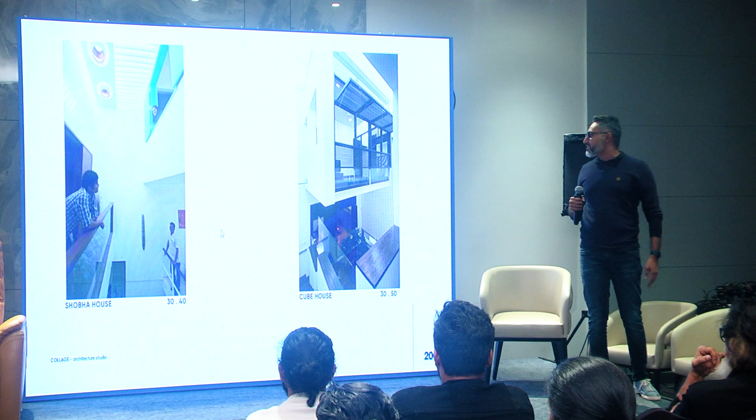Those are the two houses in section and in terms of the visual. Sections actually played a very important role as part of our design, whatever we learned in the firms we worked on. So as our projects started growing bigger, the same elements started appearing in most of our larger projects as well.

So when it was a 40-60, we started experimenting a little more on material, the way we could use light a bit differently, and not being bothered about the end product. By the time we finished this project, the whole house was covered by the tree, and we really didn't mind whether that matched the impression we started off with. We really liked this impression where the tree covers it and the project itself is in oblivion.

This project started getting scaled up, and this was a house we were doing in Goa. Earlier, we really didn't hold back the footprint because we were building almost the whole site, which happens with smaller projects. But this was the first project where we had a bigger site, and the footprint had to be smaller. This is a house that we did in Goa.

The sections became a little simpler in terms of levels, because we had that space, we could work it out a bit more linear or expand in one direction. That's a house in Goa that we did.

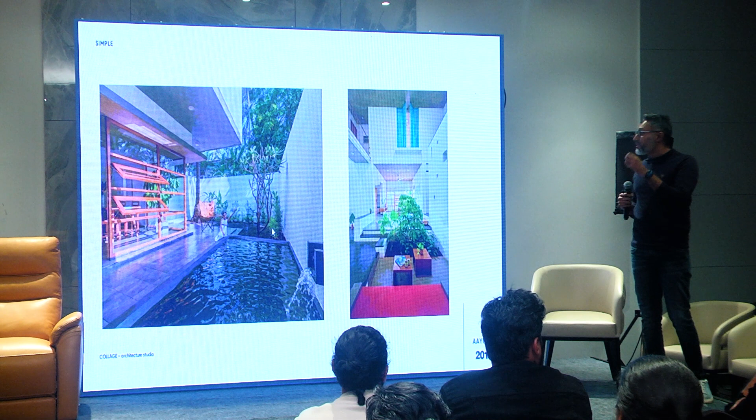Here is where we started a little more experimentation with color, trying to use the whiteness, adding a contrast to the whiteness with a little bit of exposed concrete.

In terms of light too, because Goa is really hot, you get really harsh light if you have a skylight, it becomes really harsh inside. We tried to use acrylic rods in the slab to get a bit of skylight, trying to get as diffuse a skylight as possible.

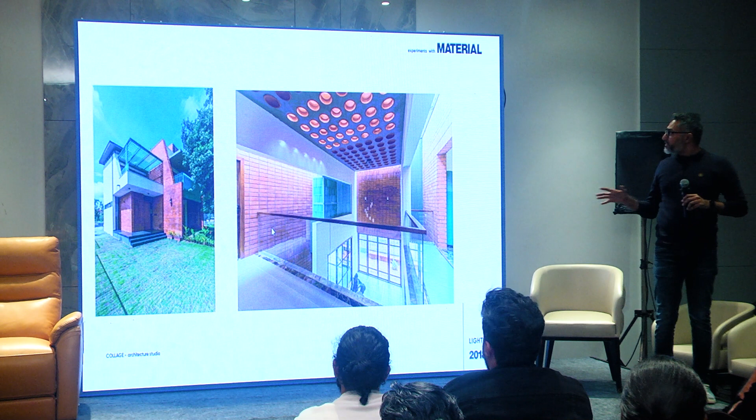Then this was a phase where we started getting a little bolder and started using brick as an element. This is a house which we did in Mysore, and the filler slab here - part of the filler slab, almost, we cut the pots and it became a skylight.

This is another house we did during the same time, a guest house in Mysore, and we used brick, again a little bit of metal, concrete. Whatever we had learned in our previous projects, we started implementing here.

And of course then came where we had to use material like stone, and polish versus matte materials. These were things that we were trying to understand.

Then again there was a phase where we came back to the urban context, but still had a larger site, and you could leave a little bit of space, but keep the ethos of the section or keep the ethos of space the same.

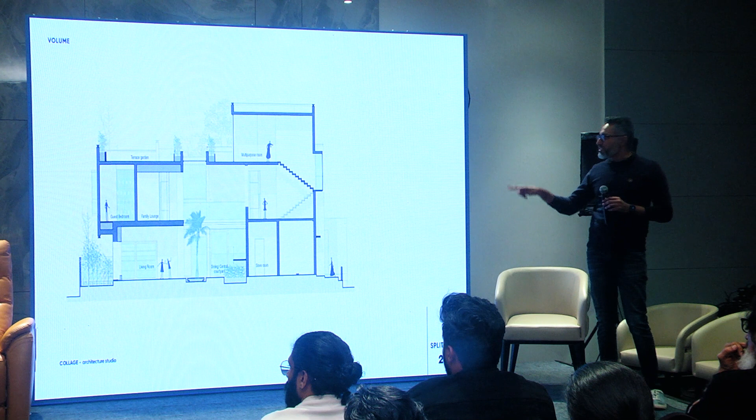The section was very simple, as the client also wanted. We had one singular skylight running through the space right from the top, coming down on both sides, making it almost like a split house.

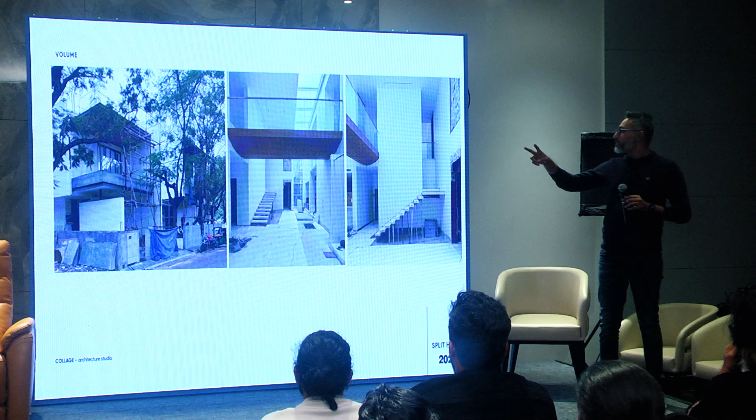This is almost getting completed, but that's the one bridge which connects both activities. On the right hand side in the central picture you see the living, the family, the informal living, and on top the informal living and a guest room, while on this side is all the master bedrooms and the kids' bedroom.

This bridge connects both spaces with an atrium that will probably have three trees and a very zen-like space.

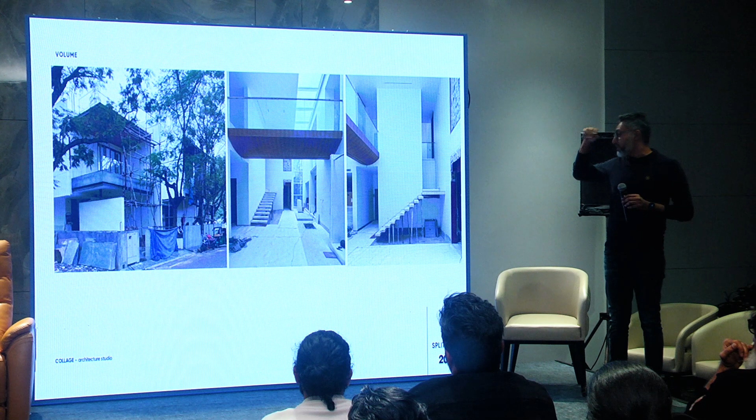This is the last one, just on the drawing board, and I thought it would be apt to show this as a section. So that's something we are looking at.

This is more squarish, but with that same idea of section - I think the proportions are a bit wrong, but that's what we were looking at, the same sectional perspective, that's how we are looking at it as a space.

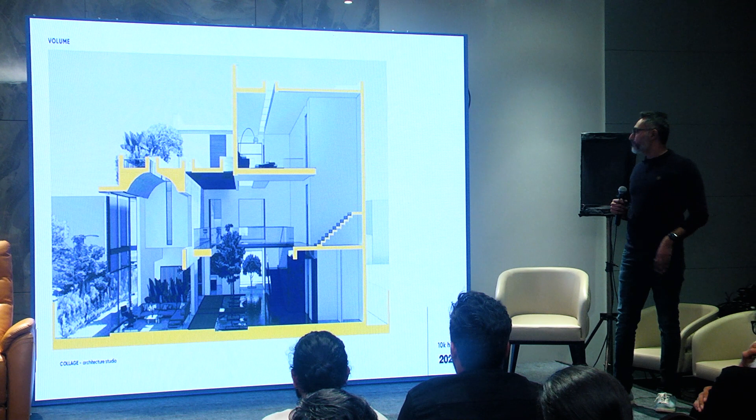So this is what we've done in residential, and now let's look back at what we could do in the same aspects as a public space.

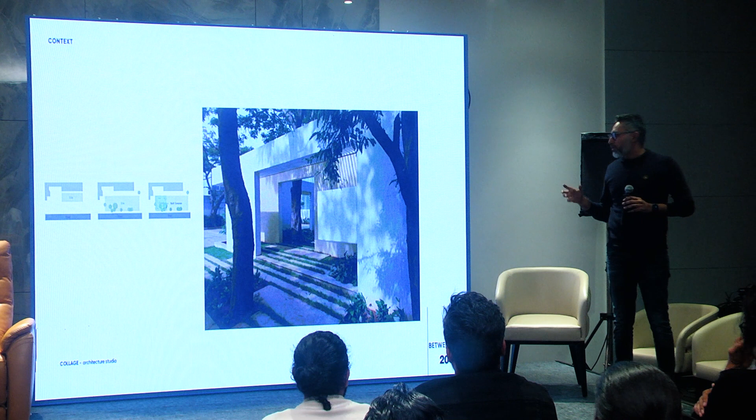We were first assigned to do a marketing center, more like an experiential center, for Rohan. This was a space left over in the setback area where there were a lot of trees, so we had to build this whole space woven between these trees - just planes where the trees start getting framed, or form a space within them.

Similarly, another experience center, but this time with coconut trees, and the plane became more curved. The whole direction of reaching your final place changed - in the earlier one it was straight on, while here it's more like a mystery. You walk past these curved surfaces, and only then you reach what you're supposed to be going for.

There was this really nice play for both these projects, which we really enjoyed working on, because these are projects that get built, and then within maybe two or three years they come down, and you really don't know - the memories that remain are only these photographs for us.

For the first time, we got an institutional project - a small school - and all thanks to Mohe, who referred us to a client. This was the first time we were doing a school.

We had to cut down his aspirations of building so much, and told him he could use the classrooms as multifunctional spaces rather than having separate classrooms for varied requirements - so each classroom could function differently at different times.

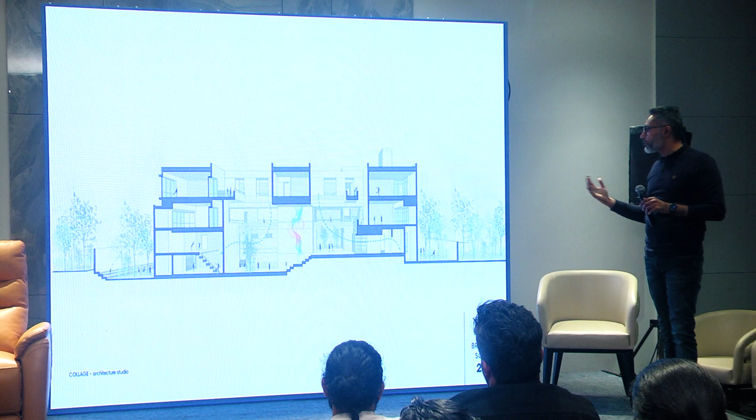Even here, whatever we had learned in terms of multifunctional classrooms, we applied - you have a classroom with a mezzanine, a classroom which again opens out into different levels, and opens out into the balcony outside. So those are a few of the images just getting ready.

So this is a project we are doing in Goa, and this project also had a lot of trees. This was a competition project which we won. Here the challenge was that it was a small project, but ideally they wanted it as an institute and as a commercial segment. So the commercial part was the auditorium, and the institute was about 5 classrooms.

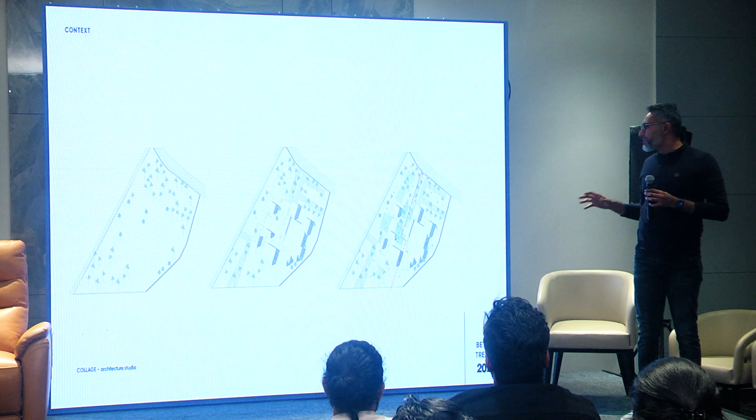So being Goa, we really thought that it should be almost like a central spine along which both these activities are divided, but that central spine should be very tropical and very open - it's almost like walking in a forest kind of a situation.

So we developed this section where on the left-hand side the auditorium is with the court, while on the right-hand side is this space which is the dining. So this is a street view. There was a level difference, so you come in from the auditorium, step down, and that becomes almost like a courtyard or a street, and then you have the dining, and it further opens out down.

The classrooms were kept at the higher level with the office on one side as a part of the section. So that's what we are looking at as you come in, and those are the bridges which start - a few sections. So we work a lot with this section.

This is a school again - this is a larger institute that we are doing now. Again, a competition, it's for hearing and speech. It's a hearing and speech institute in Bangalore.

So again, here we were really looking at spaces which started - like you have certain interactive spaces within the building, but you start really connecting it to the lower level, and you have spaces even at the higher level which start becoming like interactive spaces.

So you enter through this large space which is almost like a rotunda, and that becomes the focal point for both the institutes, and then that's when your journey starts happening and you start getting into the space. This is that space you saw as a section - you climb up, or you have these platforms at various levels where you start having these interaction zones with each other, and eventually you reach this kund.

So this was - the context was there was a lake. You reach across, the kund is at the end part of it, and then this whole idea of revealing and unrevealing at certain points is kind of taken care of over here.

And these were the existing trees, so you almost meander through these trees and reach your final destination, probably the kund. So the last group is the housing. So these are the 3 typologies that we generally work on.

So when it came to housing, I think in 2010 or 12 is when the first client came to us, and this was a standalone building with about 50 apartments. We were really trying to fit this same idea of volumes into a section. It was very difficult to convince the client first, because being a builder, he wasn't sure whether we would be able to achieve the whole FSI and the numbers. But once we showed him the chart that it was possible, he was convinced, and now it is very easy to convince him for this kind of spaces.

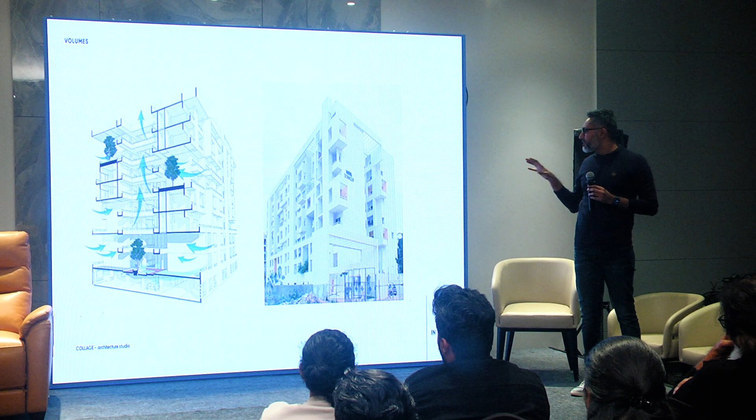So there were 8 units connected by this, all were 2 BHKs, but the 3rd bedroom got connected at different levels, and each of these became like double-height terraces within this whole built mass.

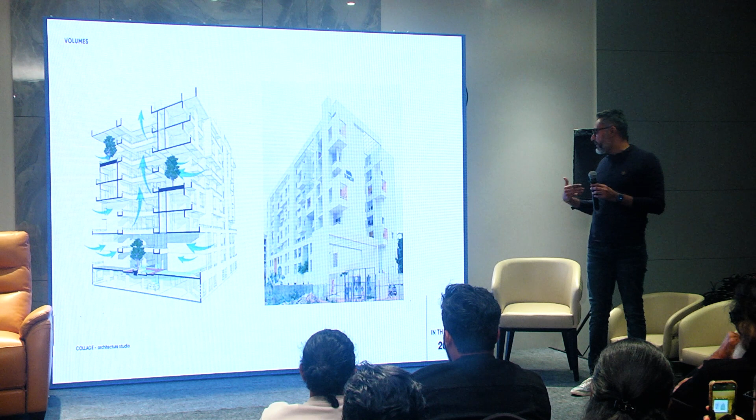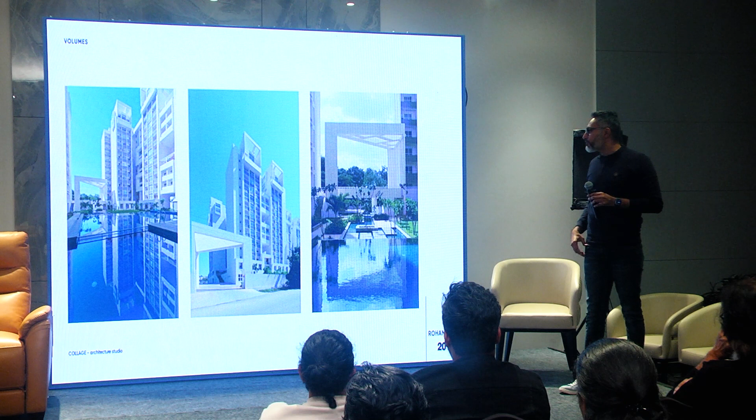Rohan, Suhas has been a great mentor to us in terms of work, and he always encourages us. So when he approached us to do Rohan Avriti in Bangalore itself, we took that same module of the single tower, and since these were 5 towers, we started working towards combining them, making them as a composition, similar to what we had done in the first project. It's almost very similar, but the scale is larger, the towers become more, and the principles we applied in the first housing project we applied here too, and eventually we went on to do another apartment for them, which was almost similar.

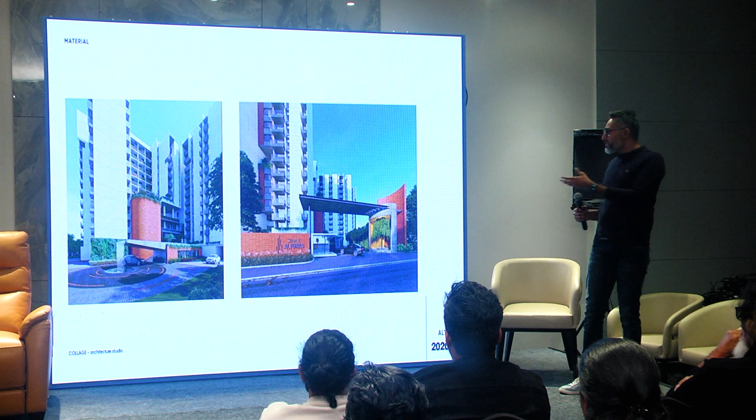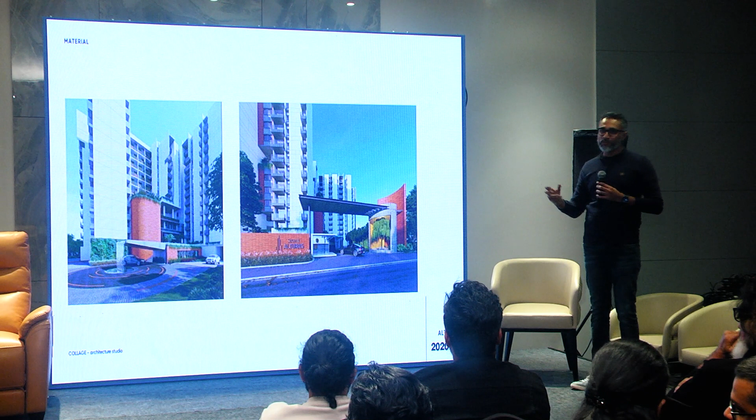This is a phase we are again going through, something new, currently on board and just getting completed, where we convinced the builder to add a little bit of texture or materiality to the building itself.

The last thing we really learned, I think, from Mrs. C and Thakur and even Mindspace, is the idea of giving back. That has really stuck with us through our hearts. I remember there were times when Mrs. C would be caring about us. If we had worked in the night and somebody sneezed or was coughing continuously, she would call up in the morning and ask who that person was, and say please take him to the doctor. She would make sure that person actually went to the doctor and was attended to. That's something we really learned.

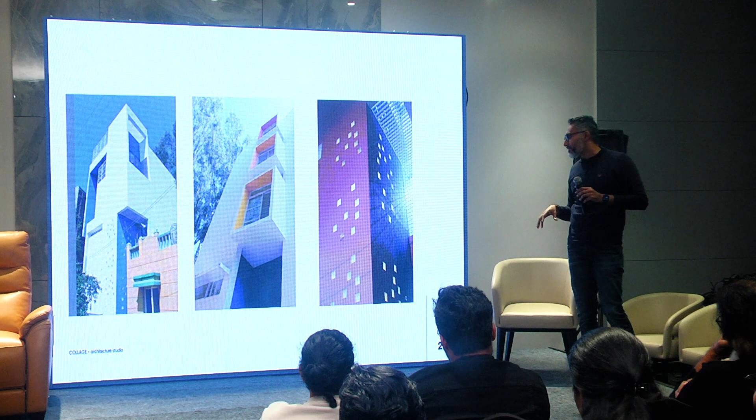In a small way maybe, we do a lot of work for Unnati. Unnati is an organization which helps underprivileged kids in terms of skill development. One of them is in our office - it's a live example, because he started with us as an office boy. Today he's like our IT head, running the finances. He's everywhere - he did the installation for IIID last year, that moving thing was done by him. We're really fortunate to have him in our office, and I think we really need to give back to this organization because they develop a lot of kids like this. So this is what we're doing for them right now.

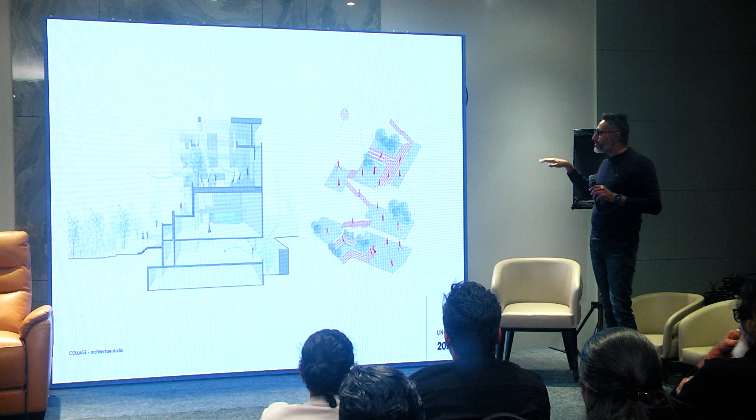This is an auditorium and community center in Kasturi Nagar. The whole idea is taking the steps all the way up into a larger community space, because it's a very tight site - they always get this tight site - and taking it to a higher level, so you actually climb through this series of steps and reach a higher level, where it almost becomes like an amphitheater, about 3 floors above.